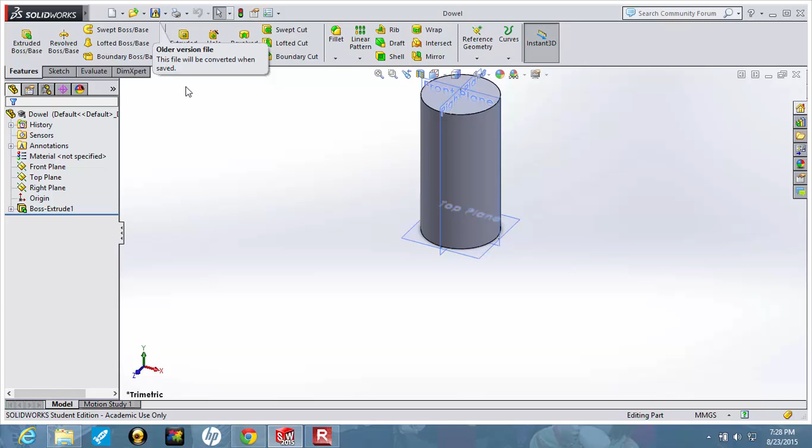You'll see you'll have the dowel piece open first, and when it opens up, it'll come up into memory. This is SolidWorks 2015, so it's going to point out that this is an older version file, but it will be converted when it's saved, so no big deal, that's what we want.

So there's our dowel. You shrink that down, and you see it's going to be down here in the left hand corner. Then we're going to go and open, and now we're going to open the leg, and view that. Again, shrink that, so now you see both of these are down there. And you're going to open.

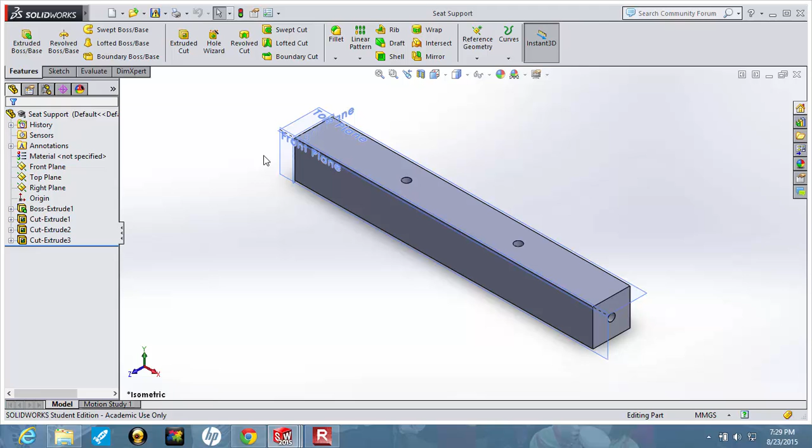Now we're going to open the seat support. And we have that. Again, we're going to shrink that down into the corner, so all three of those are open. And then finally, we're going to open the seat itself. And so there's the seat. So now we have all four files open.

The reason I do this is it's going to make importing or putting the parts into the assembly much easier. So let's go and do a new, and we're going to do an assembly. Because I have those four things open, look how it lists them here. These are the open documents: dowel, leg, seat, seat support. So without having to browse and do all that other stuff, it's nice to have these four items right here.

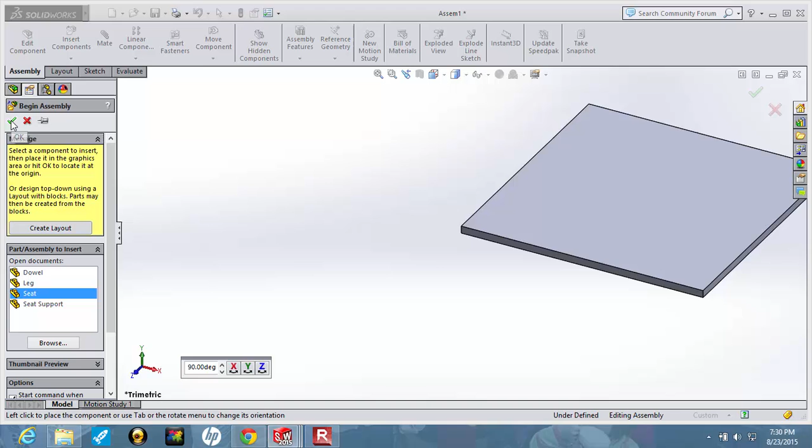It's asking me here, go ahead and select a component to insert. So the first one we want to start with is the seat. Notice when I come over here, it has the seat floating around. But what I want you to do is don't click here. Just come all the way over here and hit the check mark, and it's going to put it in exactly the right spot relative to the origin, just as the seat was created.

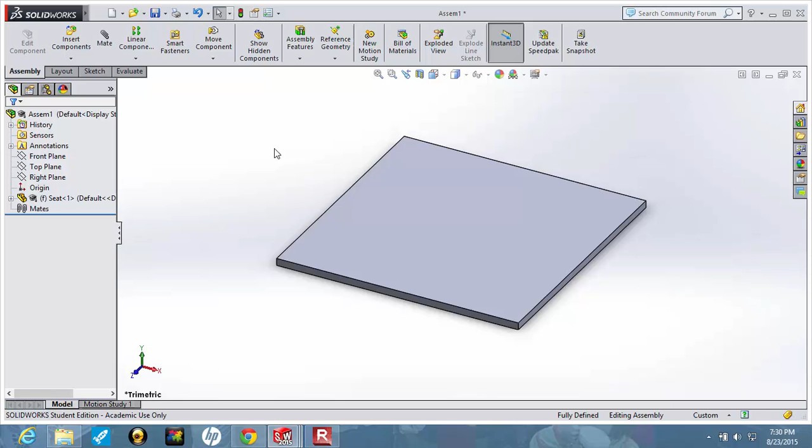So if you do that, that puts in the first one, and there's no mating to do, there's nothing to do, it's located exactly where it ought to be. So that's the way we want to do that. If we look in this assembly and rotate it, there's all the little holes in the bottom.

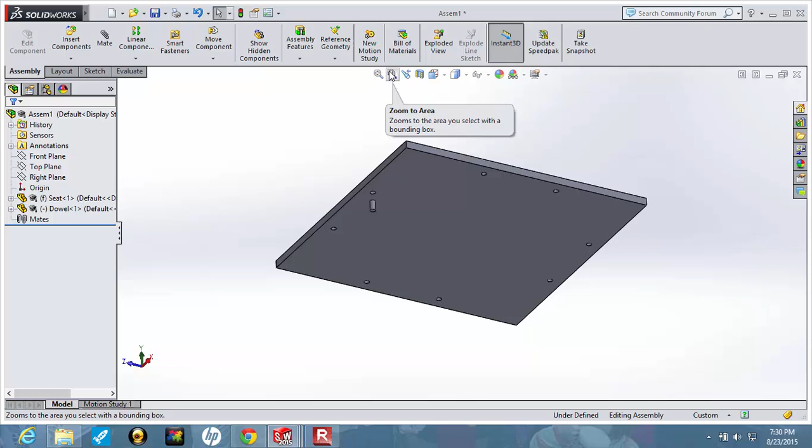And into those holes we want to put dowel pins. So what I'm going to do is I'm going to go to Insert Component, and I want to put in a dowel. I'm going to move this little dowel close to a hole and just set it there for the moment. Then I'm going to zoom in to that area, and now I can see it very close.

So you have the part in there, but it's not mated up to the seat. The seat is rock solid, it's where it's supposed to be. But now it's the dowel that kind of floats around, so I can sit there and drag it all over the place, and for it to find a home it has to get mated in there.

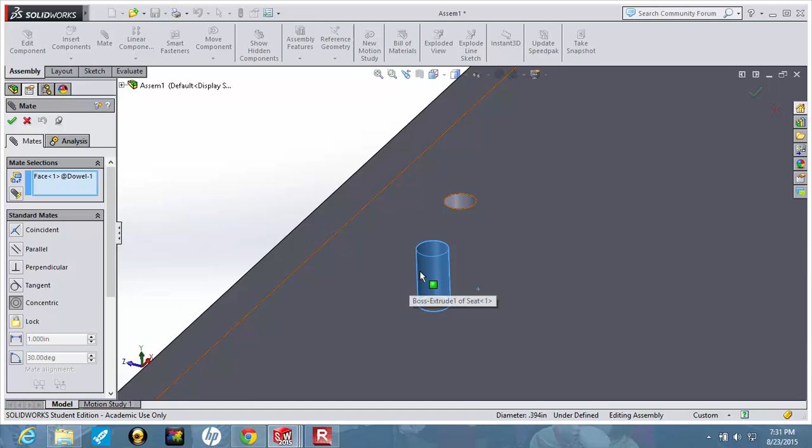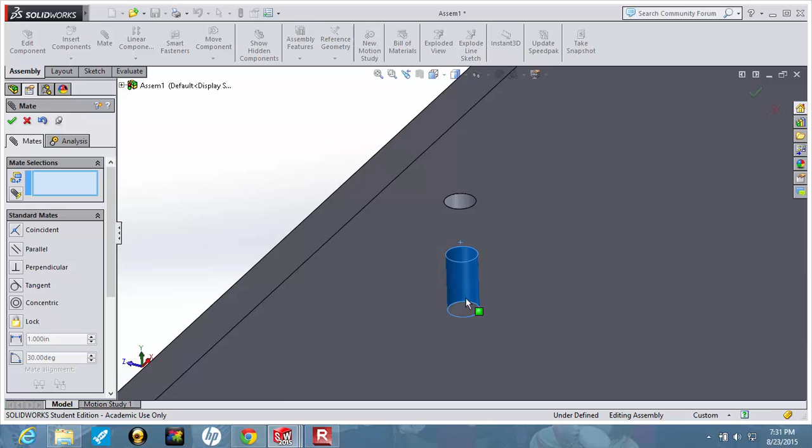So I'm going to mate, and the first thing I want to do is a concentric mate, and I'm going to select this cylindrical surface, and it already selected the other cylindrical surface because that's what I had grabbed before. What you must do for every one of these dowels is hit lock rotation and then hit check. The nice thing is that puts it in there, but it isn't located inside the hole where it needs to be. So that's just one mate that we need.

I'm going to go ahead and change this view to wireframe so that it's easier to see. Now what I'm going to do is a coincident mate, and I'm going to mate this edge with this edge, and now it is in. Notice what it says down here, it says fully defined. If it doesn't say fully defined, then you probably haven't locked rotation.

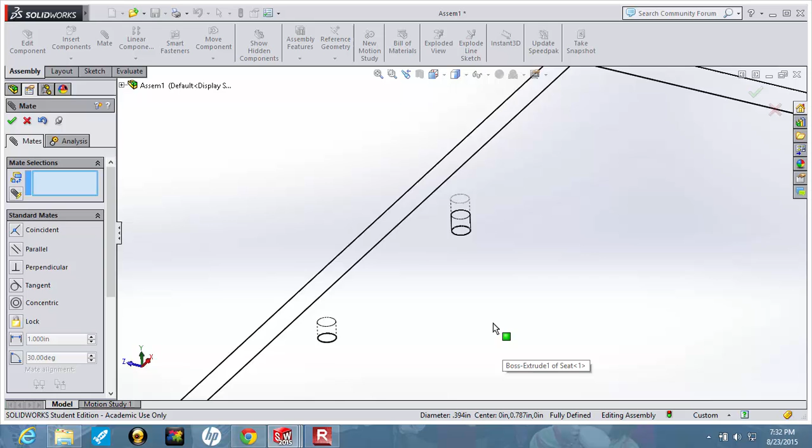So what I'm going to do next, I hit check because that's fully mated, and now I want to insert another component, and I want to insert another dowel.

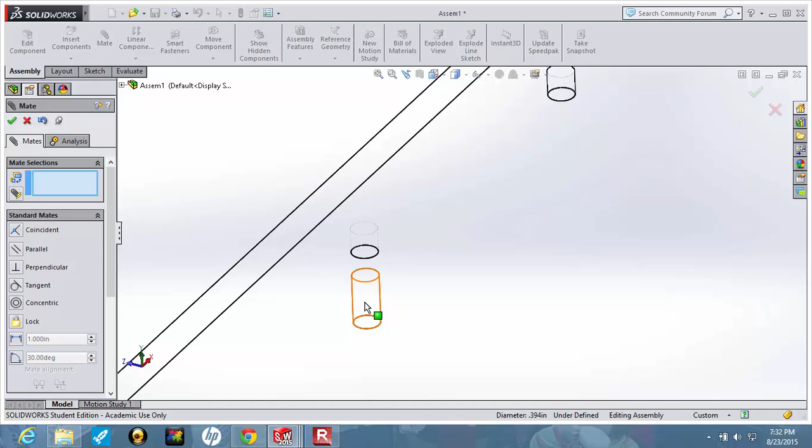So I click dowel, and there's a little dowel that shows up, and I just drop it anywhere. Then I'm going to mate, concentric. I'm going to grab this surface, and I'm going to grab that surface, and boom, they're aligned. Again, lock rotation, check. And again, it still floats like so. Now I need to do a coincident mate on this edge and this edge at the bottom of the hole.

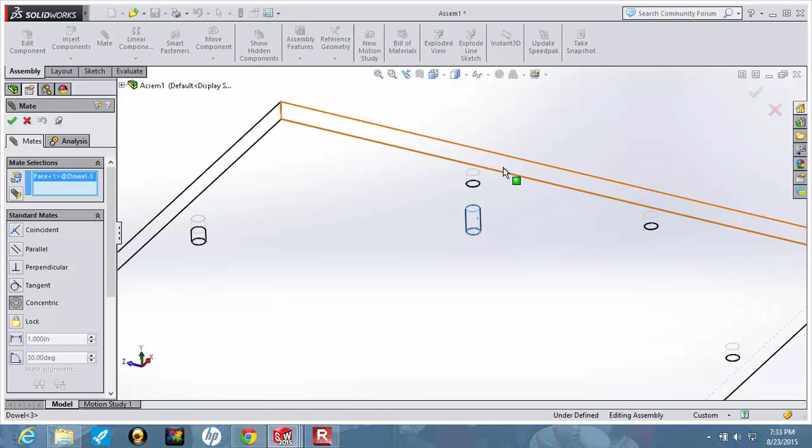Okay, I'm going to go ahead and put in a couple more dowel pins. Insert component, dowel, place, and I'm going to mate, concentric mate, that surface and that surface. Lock rotation, check. It still slides, that's okay, because now we're going to do a coincident mate on that edge and that edge. And now it's where it ought to be. And again, you see fully defined, so that's good news.

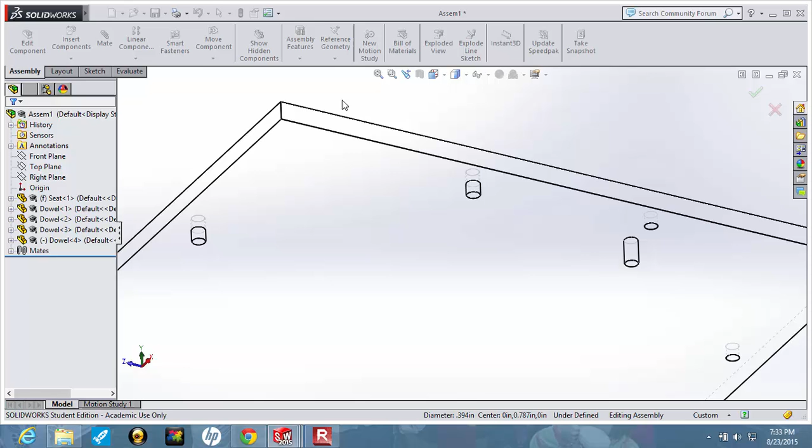Insert component, dowel, drag it over there. I'm going to zoom in a little better. And I'm going to mate, this surface to that surface. And I'm going to lock rotation, check. And I'm going to do a coincident mate there to there. And now it's in the bottom of the hole.

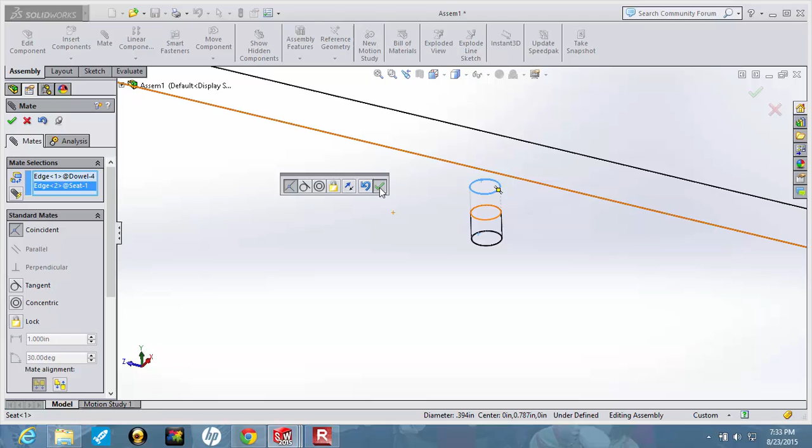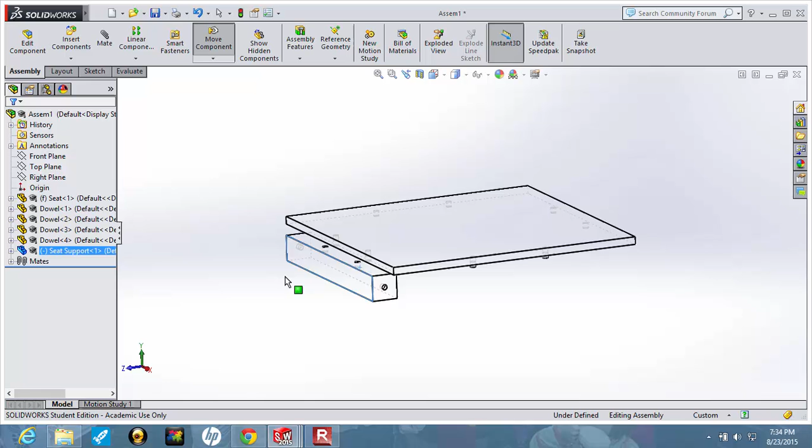Okay, so now that I've got those 4 pieces in, I'm going to go ahead and add my seat supports. So I'm going to insert component, add a seat support. And so again, this kind of floats all over the place. I'm just going to drop it there. You notice when you rotate it around, it's like, okay, I'm going to move this out over here a little bit so that I can see it.

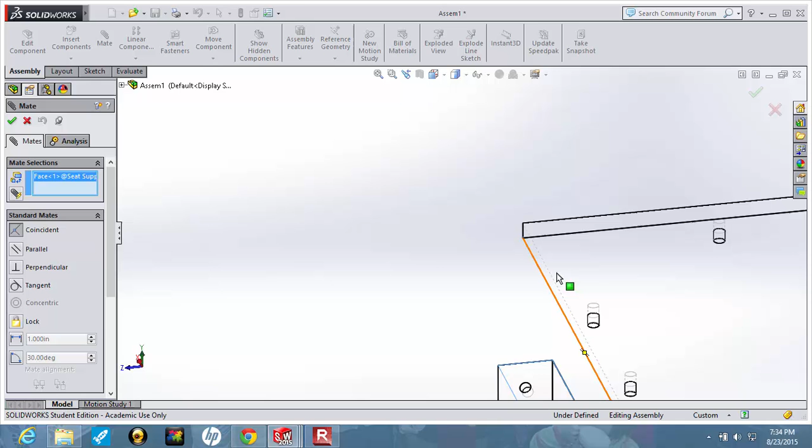Now I'm going to mate it. Stop. And I'm going to mate, a coincident mate. I'm going to mate this top surface, let me zoom in, that top surface and bottom surface of the seat. Check. And so now this can move all over the place, but at least it's in plane.

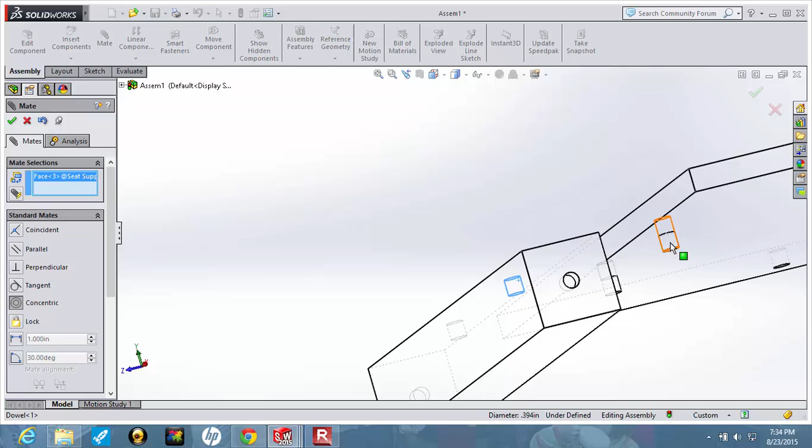The next couple of mates I'm going to do is line up the holes with the dowel pins. So I'm going to grab that hole there, then flip this up, and grab that dowel pin there. Check. I could lock rotation, but I don't want to do that. What I want to show you is right now it's constrained around that one dowel, but until it's constrained on the other dowel, it moves all over the place, right?

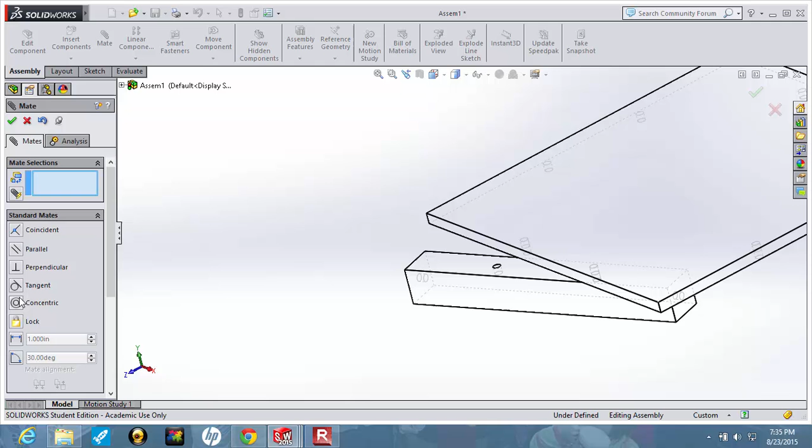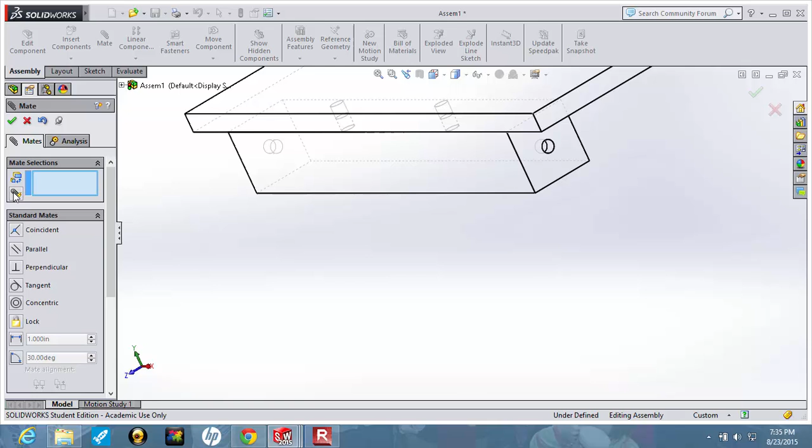So you really want to use the true mating components to define how everything's located. I'm going to grab that hole, come around here, and grab that dowel, and now it swings into place. So no need to... oops. Let's see, so you tug on it. It's interesting that it says underdefined, because if I tug on it, it's not going to rotate anywhere, so I'm not quite sure why it feels it's underdefined, but I think it's fully defined.

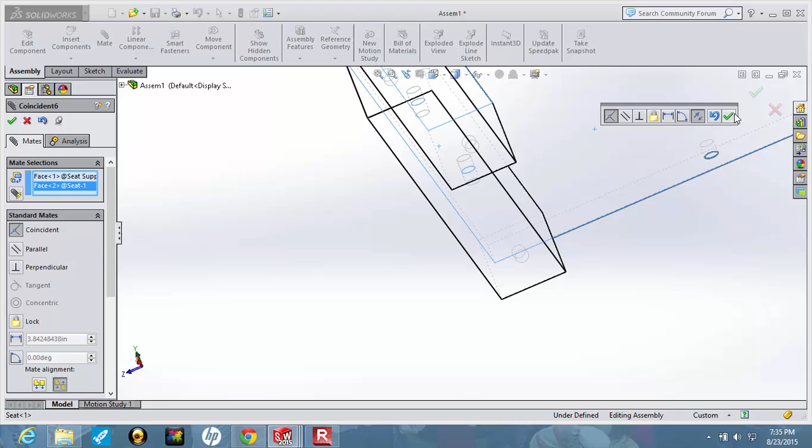So now we go to insert components. I'm going to grab a seat support, and this one I'm going to put over here. Again, I'm going to do a coincident mate of that surface and that surface. Check. So, but I'm going to go ahead and, oops, yeah, be careful of that. Sometimes you accidentally put stuff in that box and you don't want to do it.

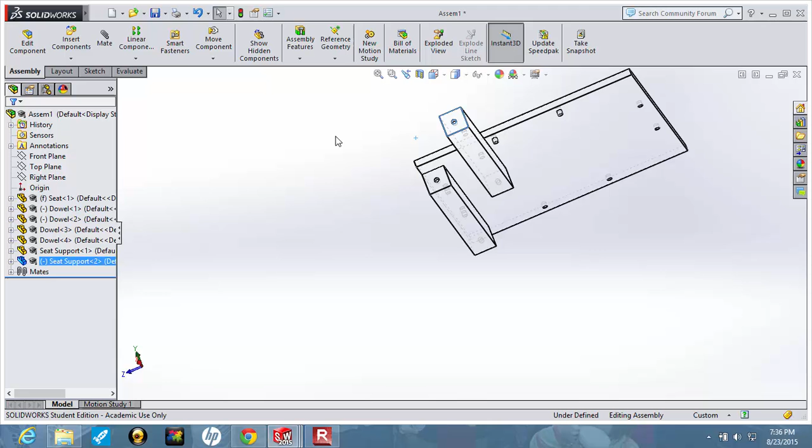I'm going to turn the mates off for a second, just so I can slide this guy around. So you can see it's in plane with this thing, but it needs to get on those dowels. So I'm going to move this out here, zoom in. So I'm going to turn mates back on. I'm going to turn off what's already in there. So you got to check that frequently. Sometimes, depending on the last thing you click, they put something in there and you may not want it.

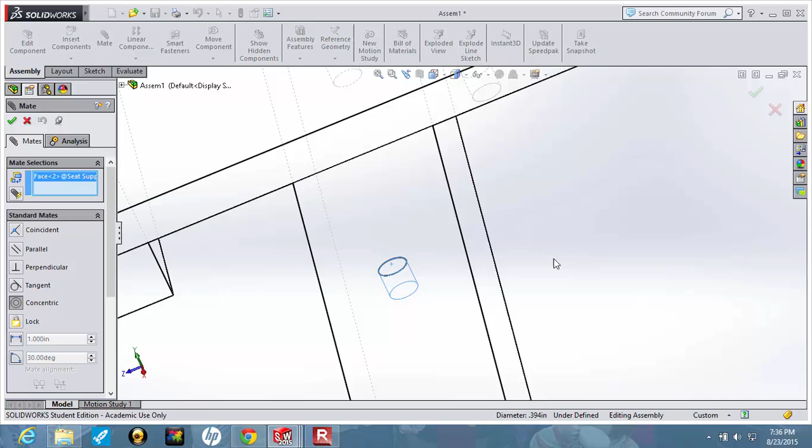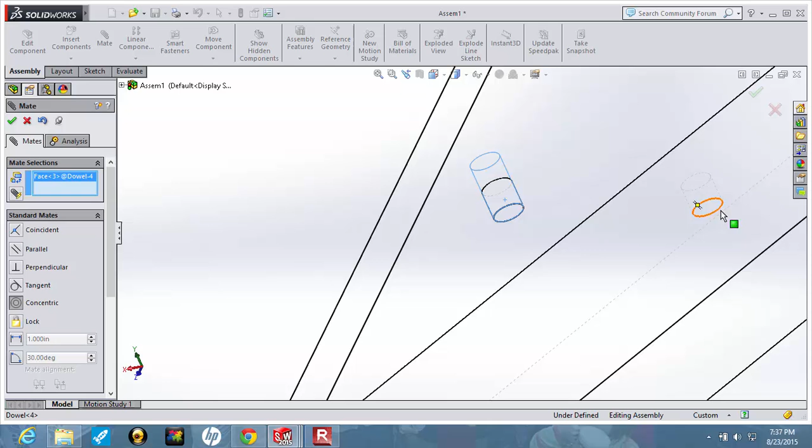I'm going to go concentric. I'm going to select that surface, and then go ahead and select that surface of the dowel. And so I'm not going to lock rotation, because if I lock rotation, that's going to be wrong, isn't it? So this is swinging back and forth like this. And if you want it lined up where it ought to be, you need to select that surface. Oops, I should have swung that thing out.

I'm going to have to get out of mates just to swing this our way. Sometimes you can block it—there are ways of getting around it, but we'll teach that later. So let me try that again, clean that up.

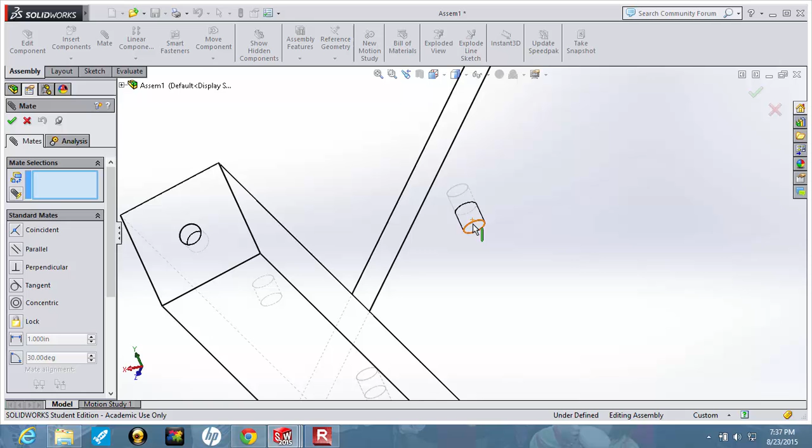I'm going to grab this surface of the dowel, and now that I've swung this thing out, I'm going to grab that surface, and now that swings back in. Again it's saying it's underdefined, but I don't know why, because if I tug on it, it's not moving.

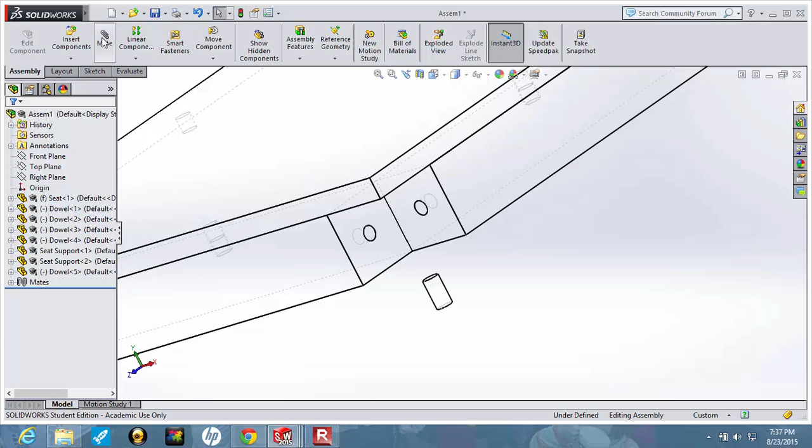Okay, so now that I've got these in, I want to go ahead and put dowels in these little holes on the ends, because I'm just trying to get to the point where I'm showing you how to put each of the pieces on. You can repeat the rest yourself.

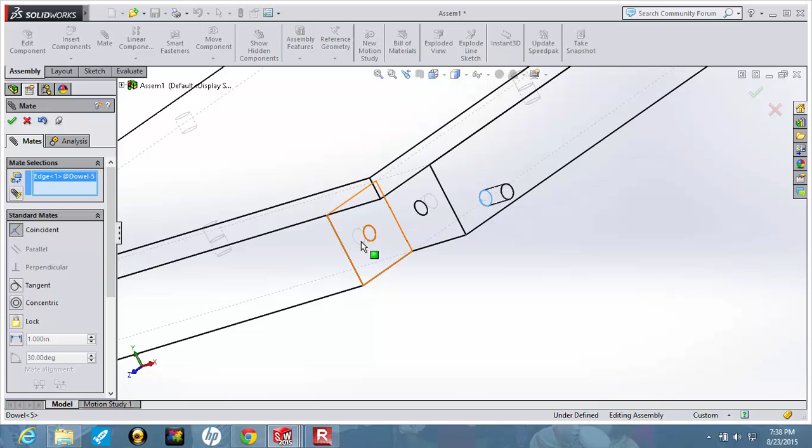So again, I want to do a concentric mate from that surface to that surface. That puts that in, and again we're going to lock rotation, check. You'll see it's going to still slide, so we aren't fully defined yet. So now I need a coincident mate between that edge and that edge, and now it's fully mated. Check, and I'm going to insert a dowel again because I need it for the other hole.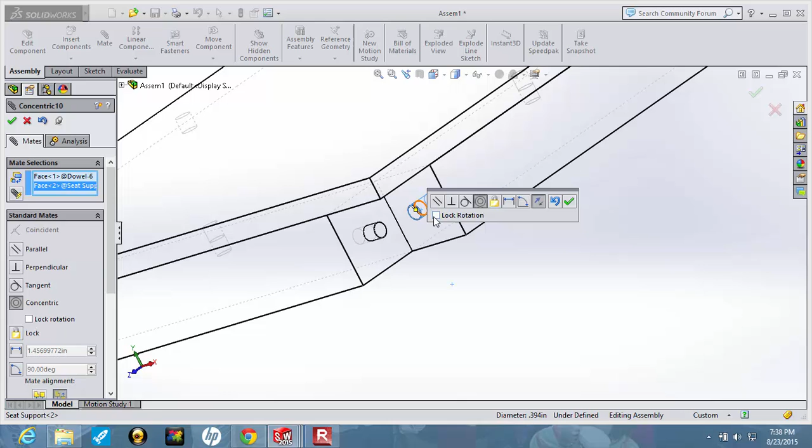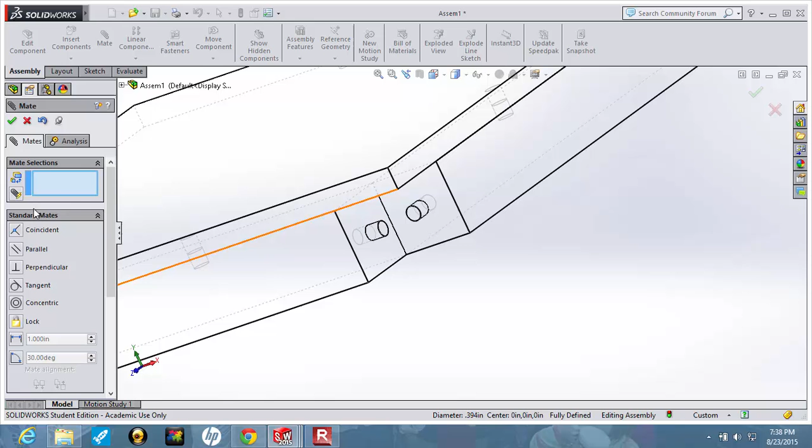I want to mate—it's going to be a concentric mate. Click, click, lock rotation, check. And I'm going to pull that out of the hole because I need direct access to all these edges if I'm going to try to line them up. So I'm going to mate, coincident, grab that edge, and I'm going to grab that edge, check, and now that's in there. That's how we're putting it together, and finally I'm going to insert the last type of component, which is the leg.

I'm going to have to zoom out and put that guy kind of close. Rotate this around. Yeah, that's pretty close. So I'm going to zoom in.

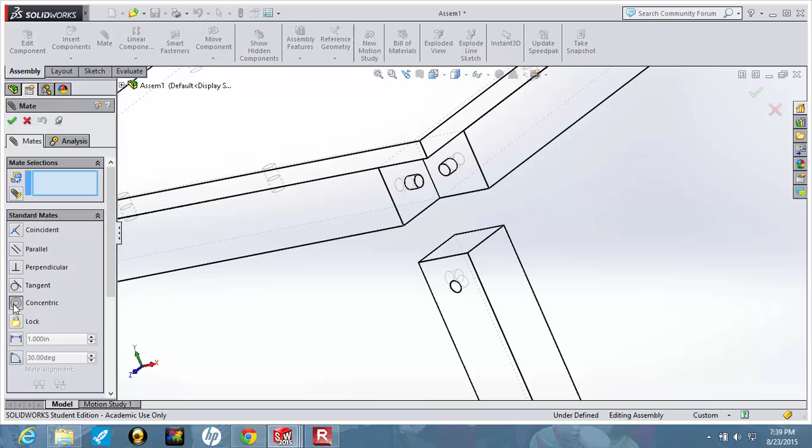Now to mate, I'm going to do a concentric mate of this surface with that dowel surface. Notice how it's pointing in the wrong direction—this thing needs to flip around the other way. There are these little arrows right here that indicate flip. So you click that and look at how that thing snaps around. So we can say check.

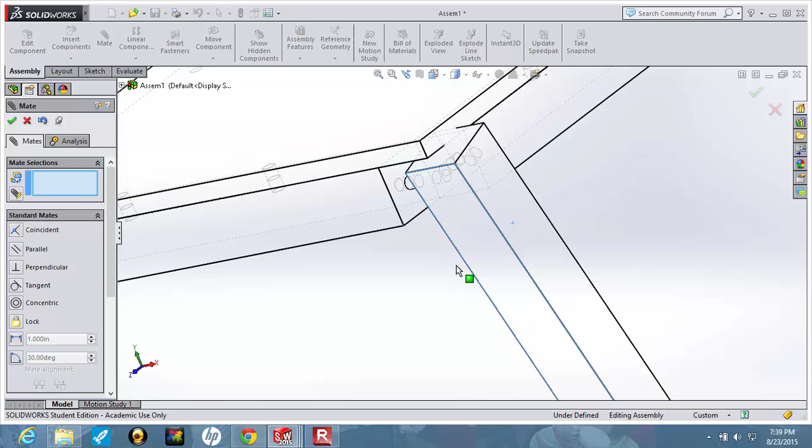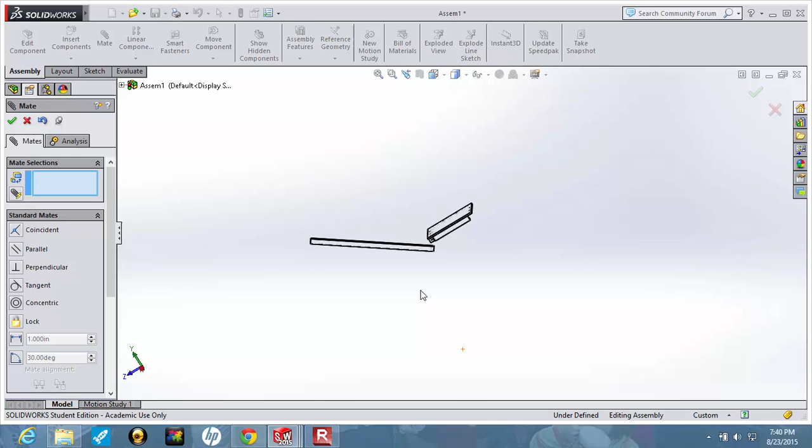We don't want to lock rotation on this one. Notice it'll go along this axis, and it'll also rotate about this pin. So I can not only do that, but get a better angle. Notice how I can grab this thing and it really swings around. It's helpful to swing this thing around because when we do our mates, we're going to want to be able to see the faces that we want to mate.

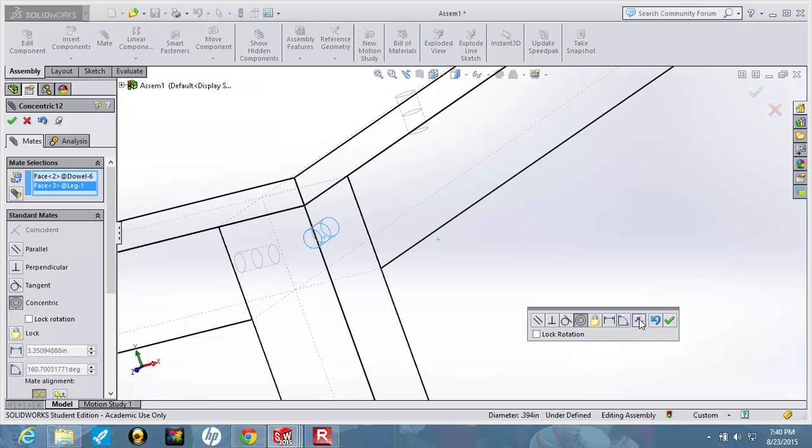So again, now I want to do a mate, and I want it to be concentric, and I want to grab this surface, and I want to grab that surface. Again, notice how it's flipped around the wrong way, so I'm going to have to grab that thing and flip, and now hit check, hit those two little double arrows, and now the leg is on.

So this is how you do this particular assignment. I'm not going to build the rest of it because I've shown you how to put each of the parts into those respective things. So now it's just a repeat of everything that you've seen me do here. So, but this is how to do it. So I'd like you to go ahead and continue trying to do it.

Now, when you do the save, this is going to be important. So let's do save as, and I'm going to want to give this a name. This is the folder that I created for those three things. So we need a folder in which this new assembly is, as well as those 4 parts. So I'm going to call this Stool Assembly, and I'm going to save.

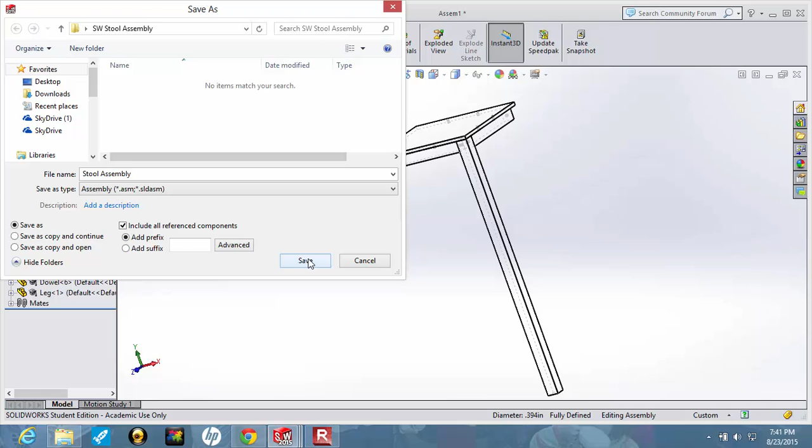But notice I'm going to Stool Assembly, and I'm going to include all referenced components. So it's very important to click this box, and that's going to save in there. And I should get some sort of warning about upgrading to a new level. Maybe it's already done it.

But anyway, I've now saved it so that when we go to this folder and I open up this SolidWorks, here's my Stool Assembly, and here's all 4 of my parts. So what I want you guys to do when you turn this in is you're going to right click and see how it says send to. Oh, I don't have compression software on this. Oh wait, no, here—this is 7-zip.

For me, I have to do it this way, but for you, it's going to send to a zip. So anyway, you send it to a zip, and then it becomes a zip file, and that's what you upload. So anyway, that's how you do this particular assignment.